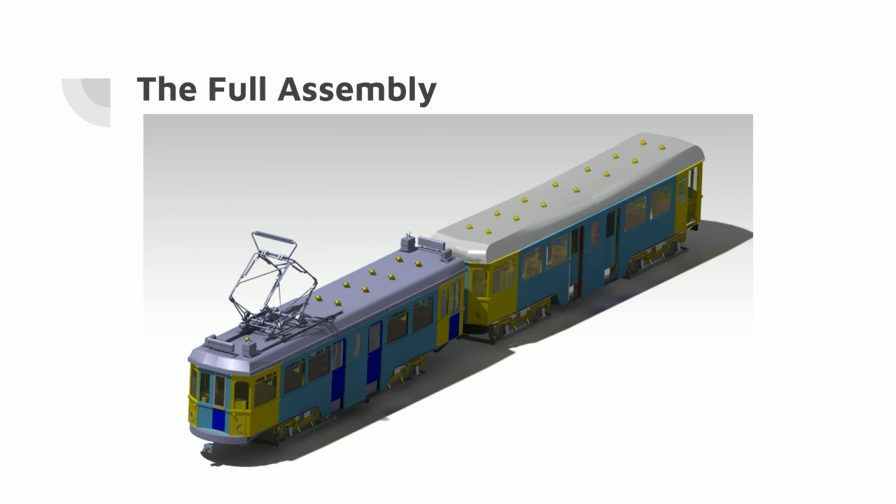For the subassembly, the wheel skirting was one of the more difficult parts. Getting the correct angles on the front and back edges while keeping the top and bottom edges of the angled part level with the side brackets was the biggest problem.

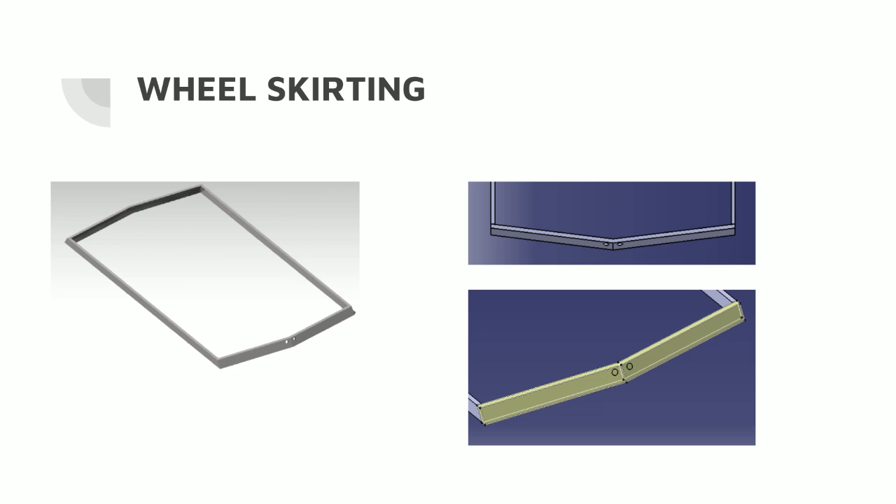To create the angle bracket, generative shape design was used, and the upper and lower profiles for the angle bracket were created and then connected to each other to create the overall outline, and then they were filled to create the shape that is shown in the bottom right corner of the slide. And then from there, the surface was joined together to become one, and then closed to become a full solid surface, and that's how that part was created.

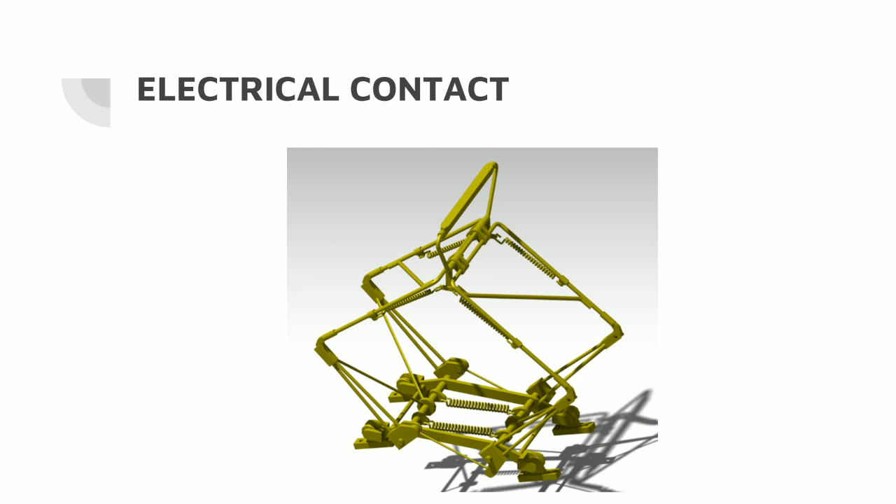Okay, so I was responsible for modeling the electrical contact that sits on top of the tram and translates the energy from the tram lines down into the motors. This consists of an electrical contact on the top, damping springs, stay supports, hinges, restrainers, and base and foot assembly that mounts to the top of the tram.

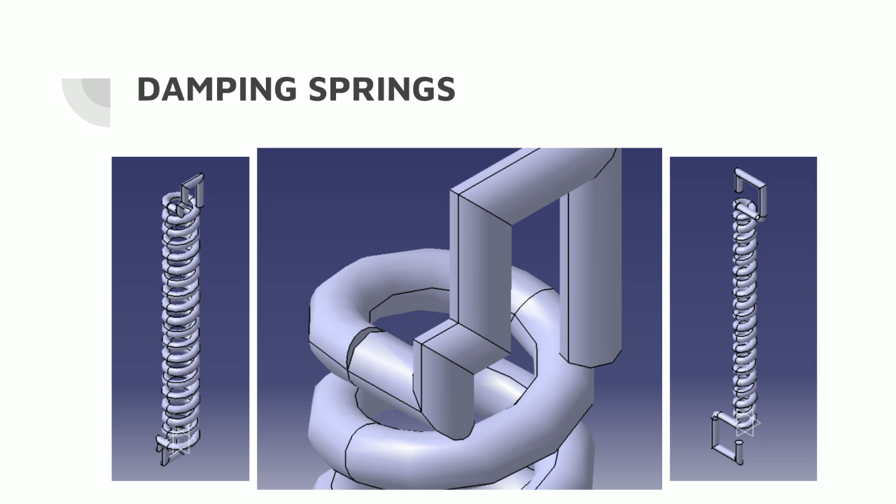And any discrepancy between that vertical change would adjust the horizontal position as well as the reverse support side through the restrainer. So the presence of the restrainer bar meant that this assembly had to be perfectly symmetrical, and any deviation in the vertical or horizontal direction from the non-properly dimensioned stay supports would translate through the entire assembly.

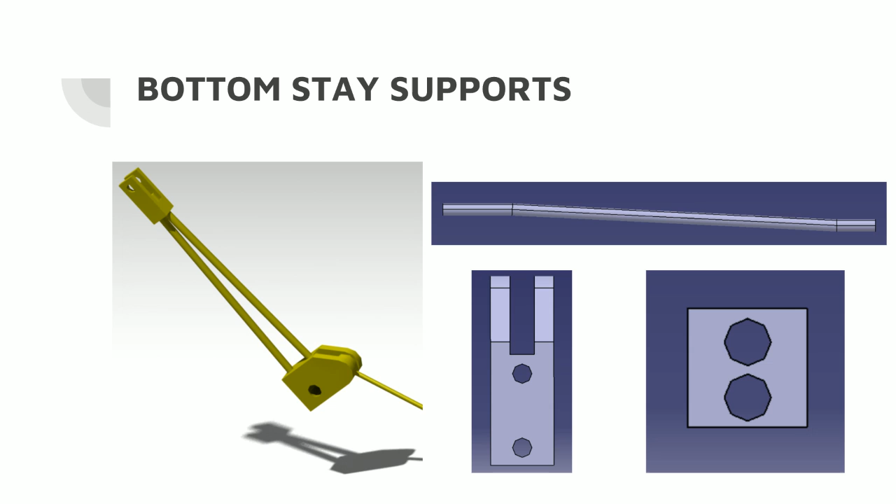Also, what we see, I had to create the inside parts which go in the main body, such as the chairs and the hand control, including also I designed the windows and the doors, but I didn't design the housing. It was designed by Chris.

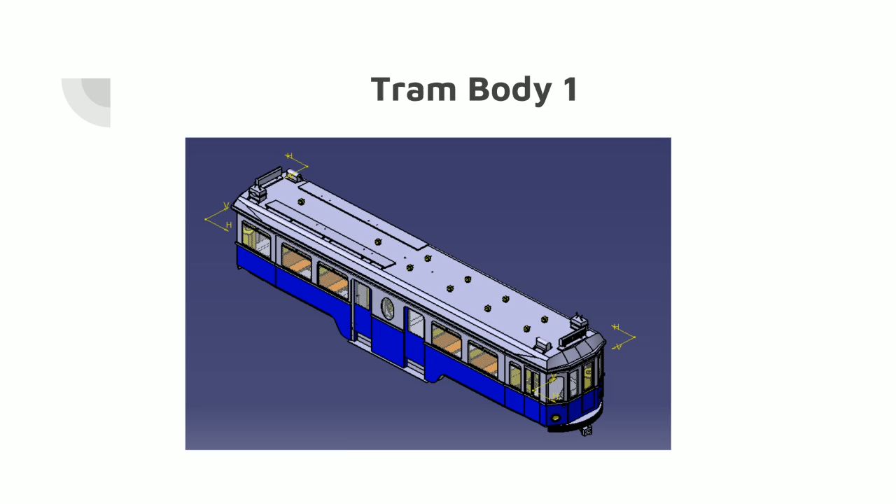This is the hardest part that I created, the roof. It was hard because I had to use both the generative shape design and the part design. So what I did, I created a lot of points and joined them with lines.

But in the end I actually realized that I could create half of it and mirror it, but before I didn't think about it, so I ended up finding the coordinates of each point at the end of the roof and then joined them. Then after joining them, I used part design to get the whole roof.

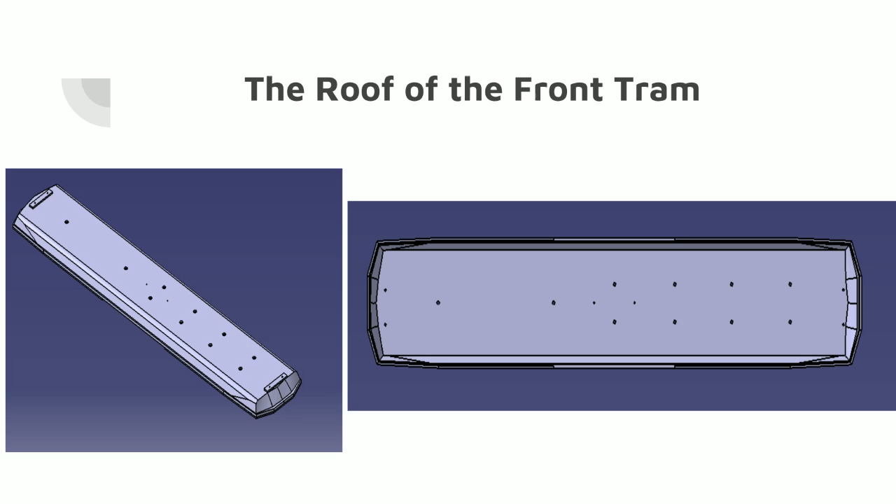One of the biggest challenges regarding the tram itself was that a lot of the support drawings lacked the necessary detail to get the angles for the sides right, including the roof and the floor itself, which you can't really see. And in order to overcome this, I really just had to kind of guess and check and make sure that everything lined up when it was going to be assembled.

And I had to really hope that as long as my parts fit together, the tram body itself would fit onto Marie's tram that she had made as well. Thankfully, everything did. In the end, there was a pretty fun mix of challenging and also some slightly relaxing parts on this, like the windows, some of which were just rectangles on rectangles.

But the roof itself, I had the same challenge as Marie with GSD and making 15 different planes just to get all the support curves in the right spot.

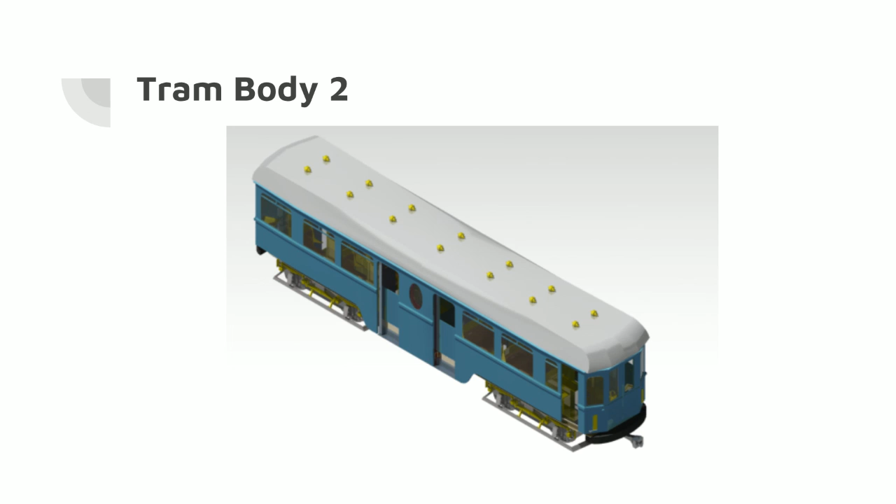So this is the actual tram body itself, and while it's supposed to all be one big part according to the worksheets that we worked off of, I thought it was best to break it down into quite a few different parts, because it just made sense to break it up where the angles changed. That way it wasn't a massive headache to create all in one go.

And since all of the sides were effectively mirrored, it was a lot easier just to break it up and design it that way. I could have used the generative shape design for this if I was going to build it all as one big thing. However, that would have just been a massive headache, and I really wanted to avoid that.

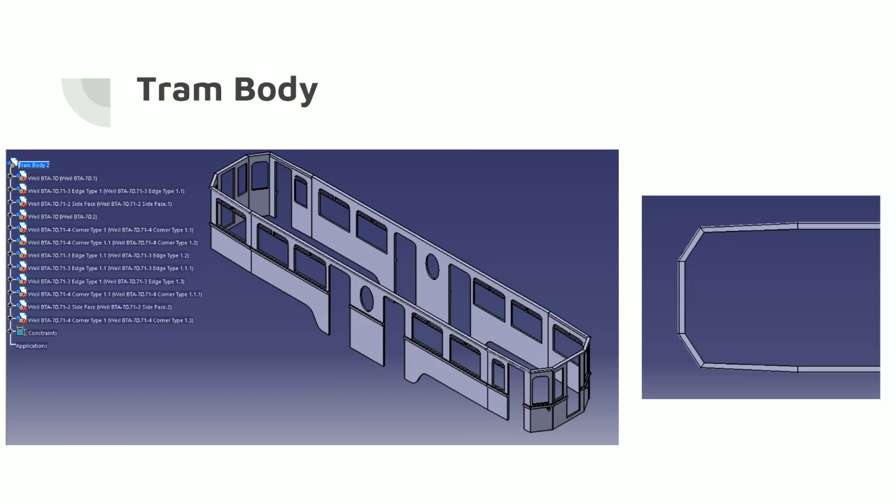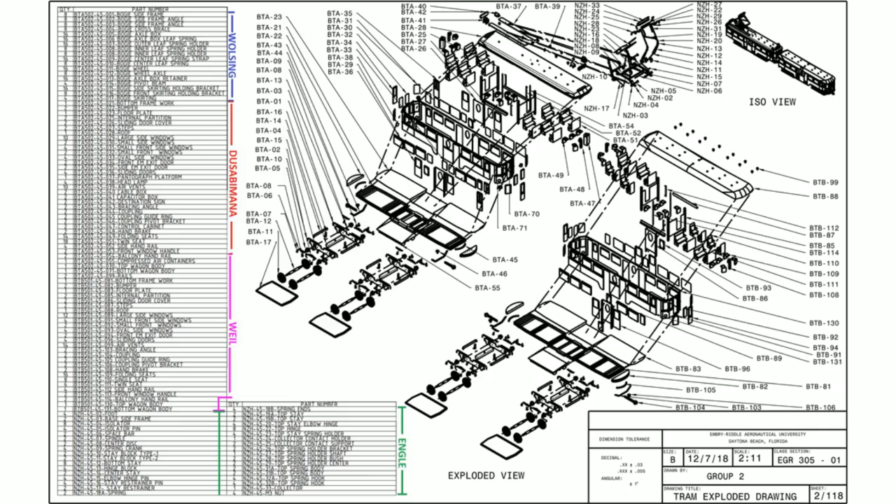If you have any questions, you can direct them to our complaints department. Thank you.